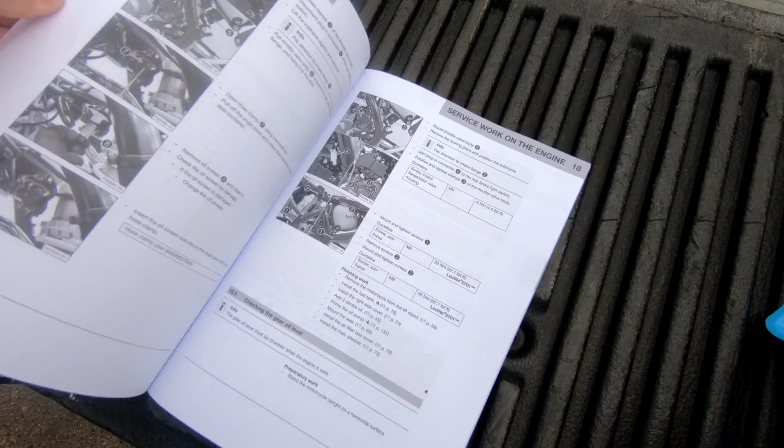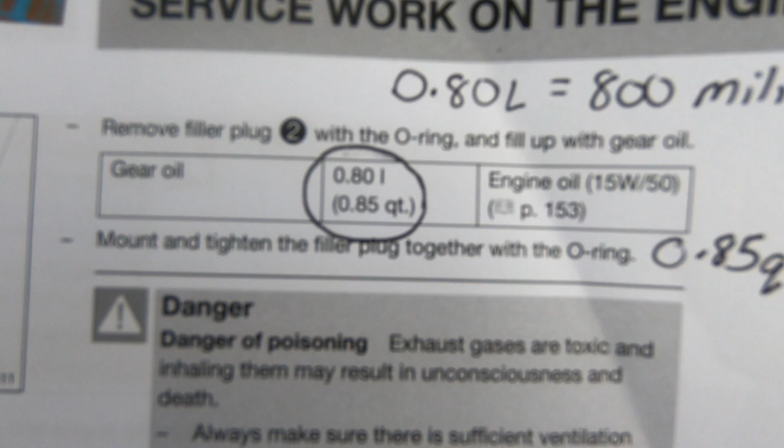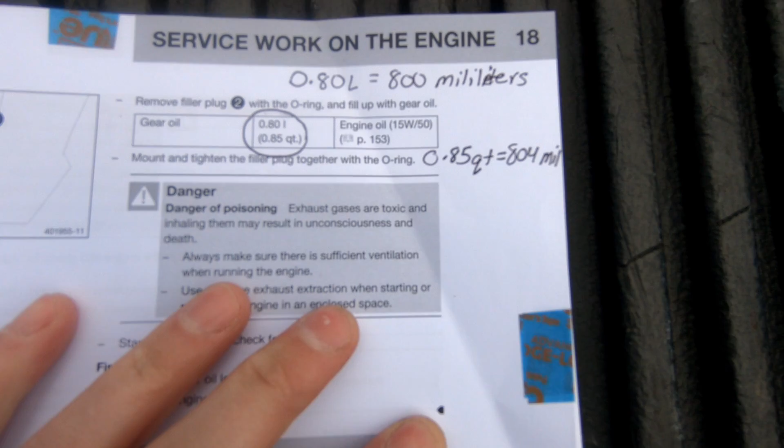Alright guys, so what we're looking at here is the 250 XC TPI and the 300 XC TPI manual, and we got the owner manual for the 2020 150i, and we're going to be looking for the oil page. All right, so on there you can see that it's 0.80 liters, and I calculated that out to 800 milliliters, and 0.85 quarts equals out to 804 milliliters. But we're gonna debunk this because I don't feel like this is correct.

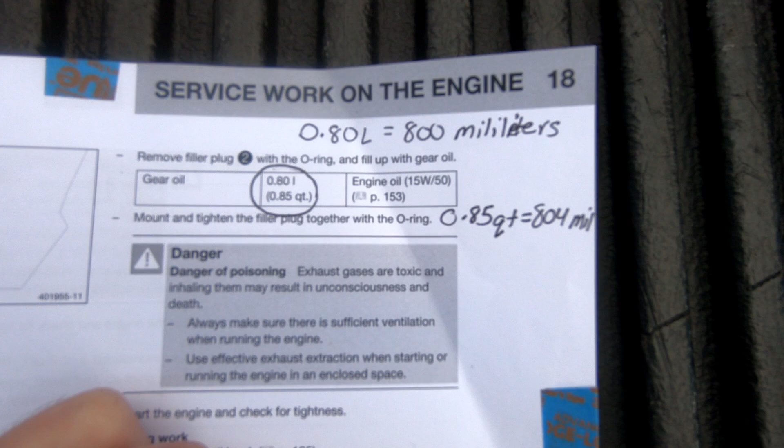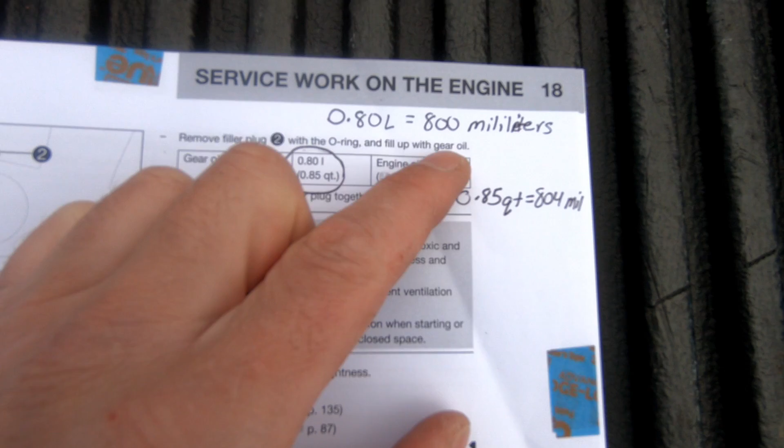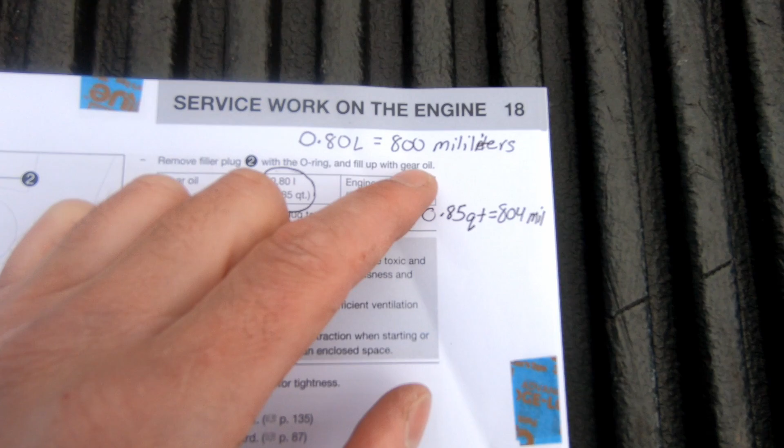My buddy has a 2020 250 XC, and he told me that he put about 730 milliliters in, and the oil started coming out the weep hole, and he claims it's because these numbers aren't, you know, wet. So in other words, if the motor was completely bone dry, then it would take 800 milliliters. And a lot of people are like, oh, what's a couple extra milliliters or whatnot.

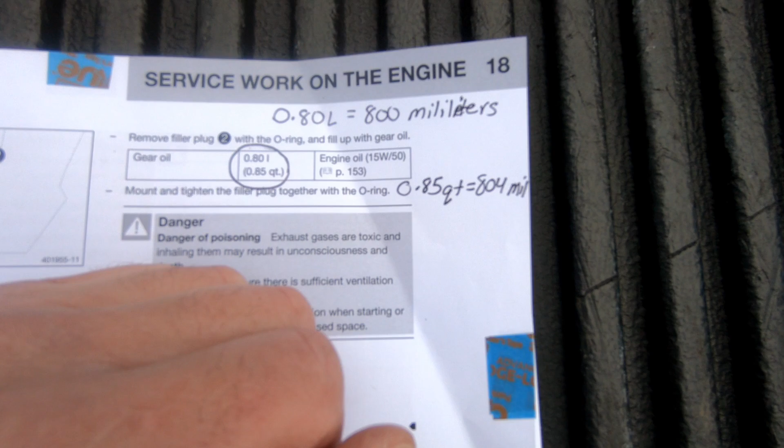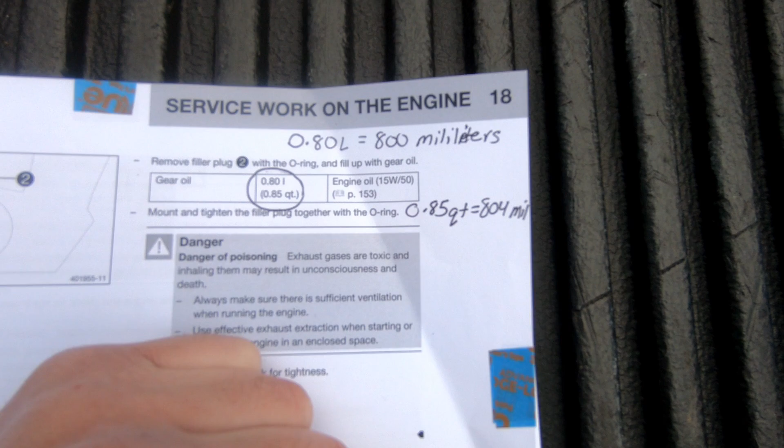It probably won't hurt anything in the 300s and the 250s, but in the 150s, the more oil you put in, the more clutch drag you'll get, and also we need as much power as we can on these bikes. So again, especially if you're using a thicker oil, the more oil you put in, the harder the motor has to work, and the less power gains that you're gonna get.

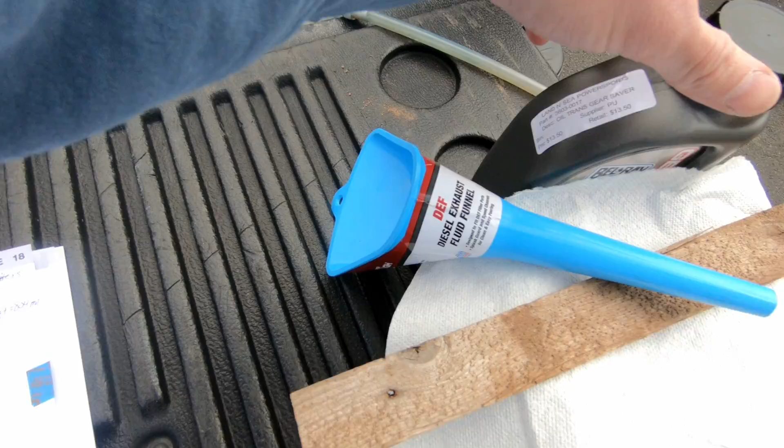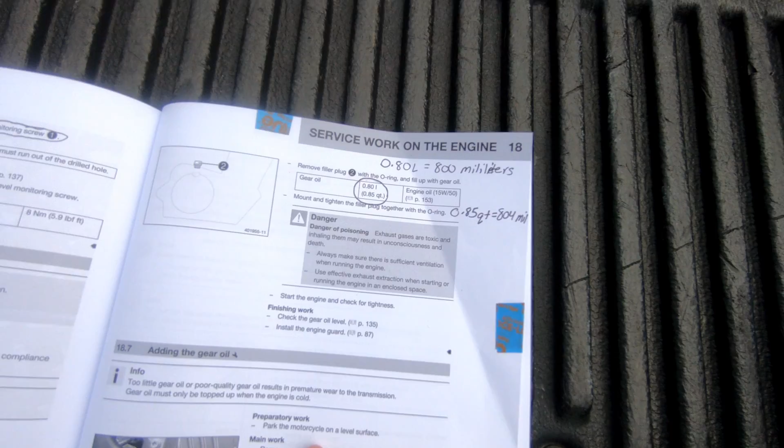Like today I'm gonna be using the Bel-Ray 80 weight. They're recommending it. I was normally using the Motorex 1550, but today I'm gonna try something a little different because it's gonna be summer soon and it's gonna be hot, so it won't really matter. So anyways, I just want to clear this up. The 150 is saying it's taking 800 milliliters.

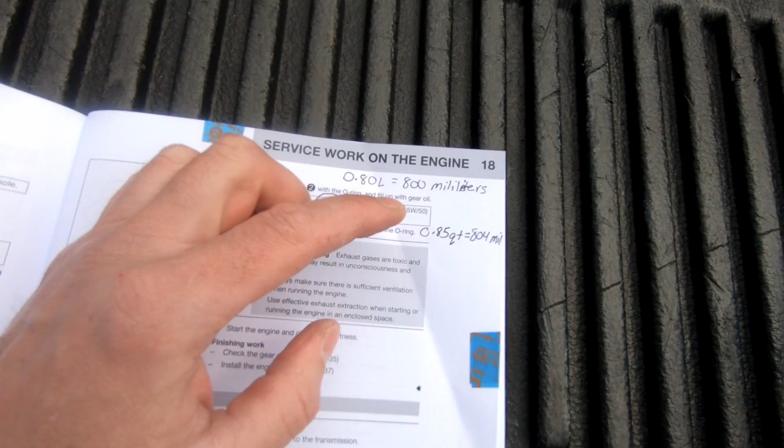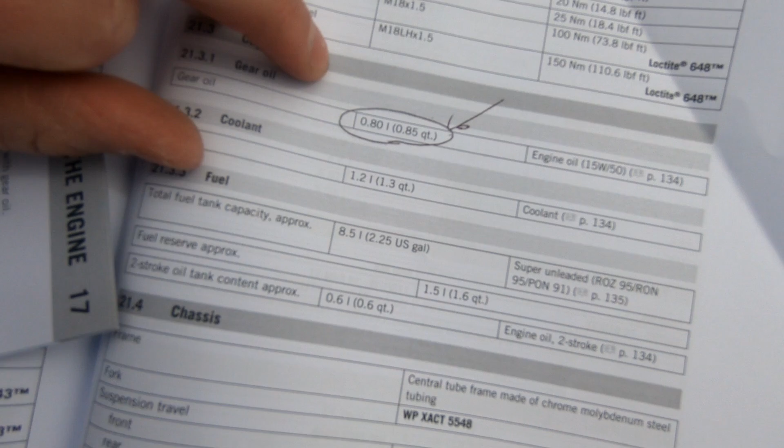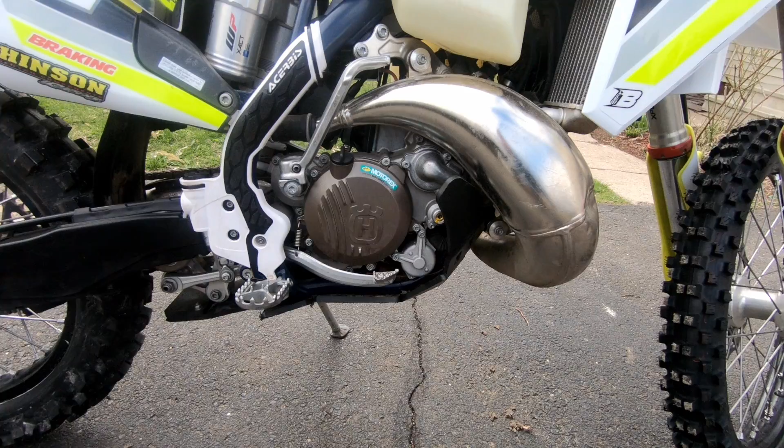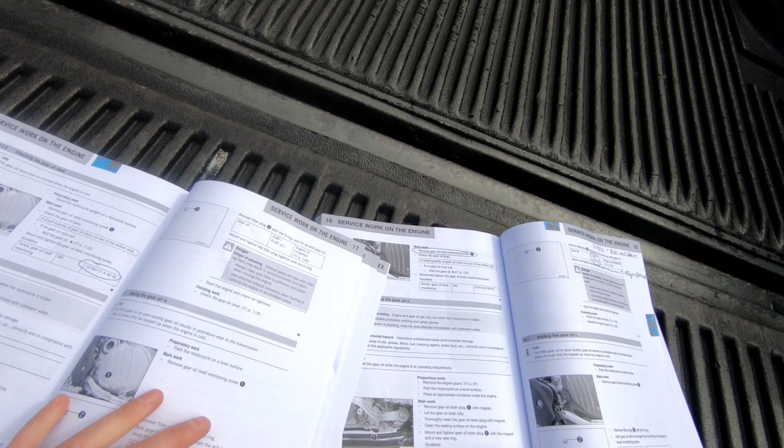Now we're gonna move over to the 250 and the 300. The 250 and the 300, again, 0.80 liters equals 800 milliliters. So it's the same. Now we're talking about this big ass motor to this little ass motor, but the bottom ends, I'm assuming, are pretty much close to equivalent in size internally. And so we're just going to debunk that all these 2020 TPIs are going to take the same amount of oil, considering in the owner's manual it's telling you that both are taking the same amount of oil.

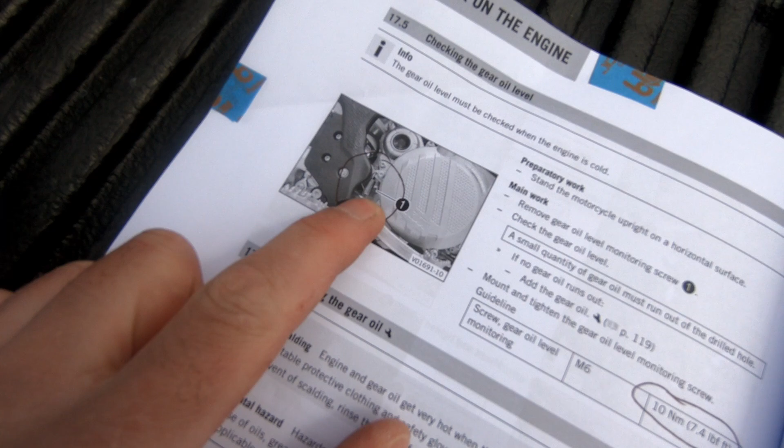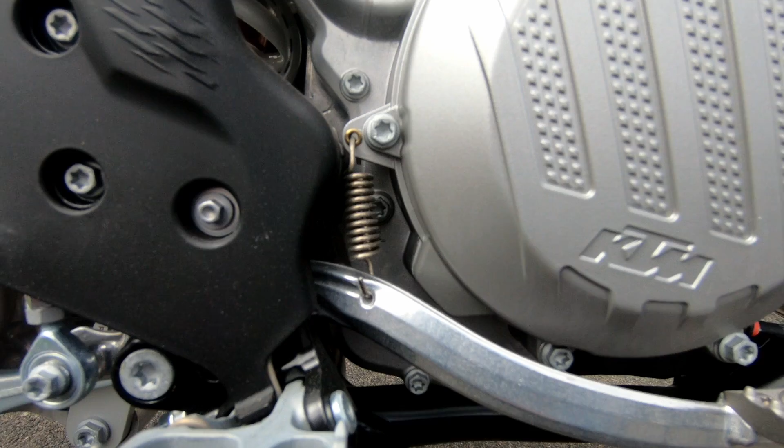So here, I don't know if you can see that, it's showing the weep hole is right here behind the rear brake lever spring, and this is for the 250. And if we take a walk over here, I don't know if you could see that, but you can clearly see that bolt, and it does say oil right under it. And if you can't see it on the video, you'll see it on your bike. But so we know where that one is. We don't need this manual anymore.

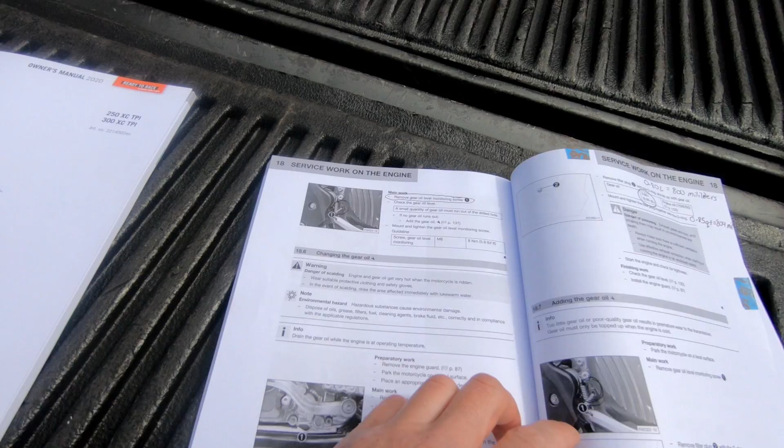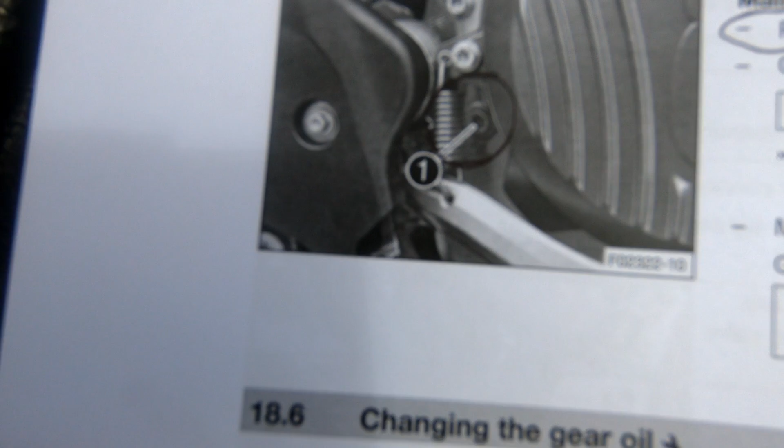So the 150i shows the same exact location behind the brake lever spring, and it says oil on it. So something tells me that they just used a fucking generic, this is for the 250 and the 300, but they didn't want to waste their time putting the correct location for the 150, and they just let everybody guess.

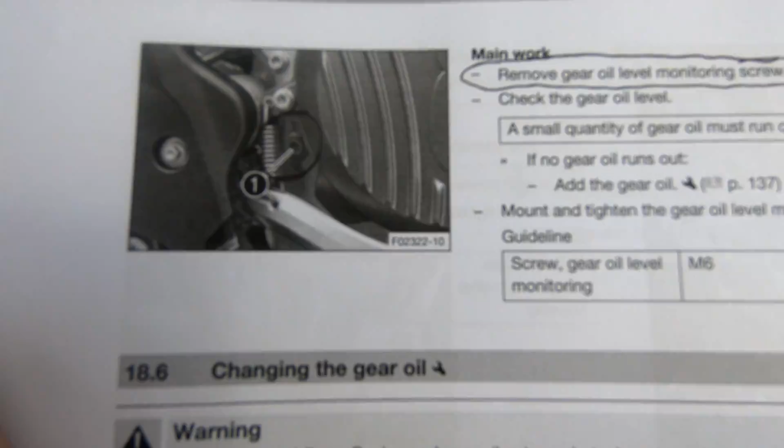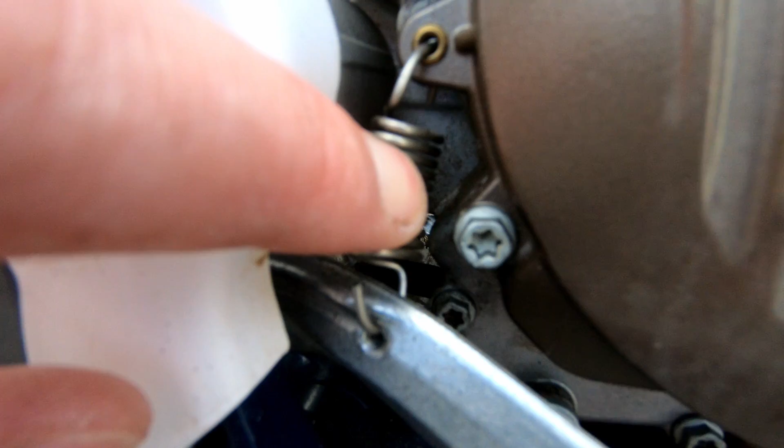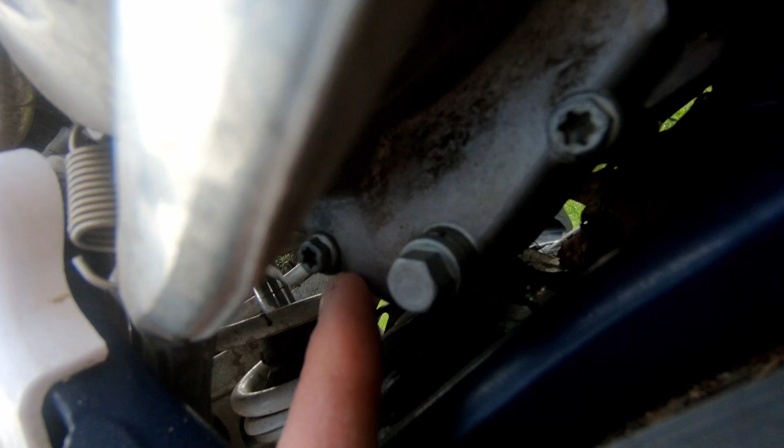And if we come over here on the 150, there is no bolt, you know, weep hole behind this spring. The closest one is the one all the way, I don't know if you can see that. That one right there. And there's no fucking way that you're putting that little bit of oil in this bike. So I'm going to show you exactly where the weep hole is for this bike.

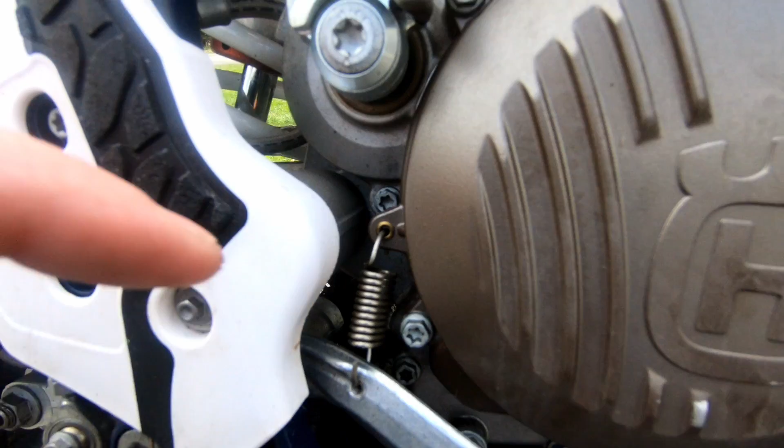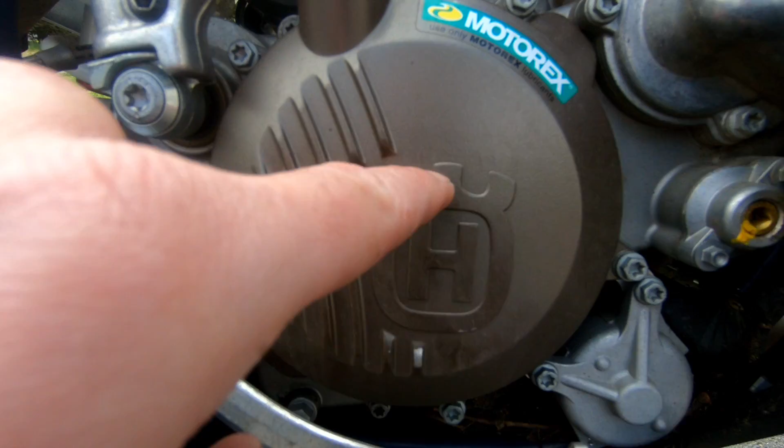And people were saying it's here online. Other people were saying it's this one online. And this is just too, the oil level is too high. It's half. Now, the main purpose of the oil in these bikes is to lubricate the clutch plates, to lubricate the gears and the crank. That's it.

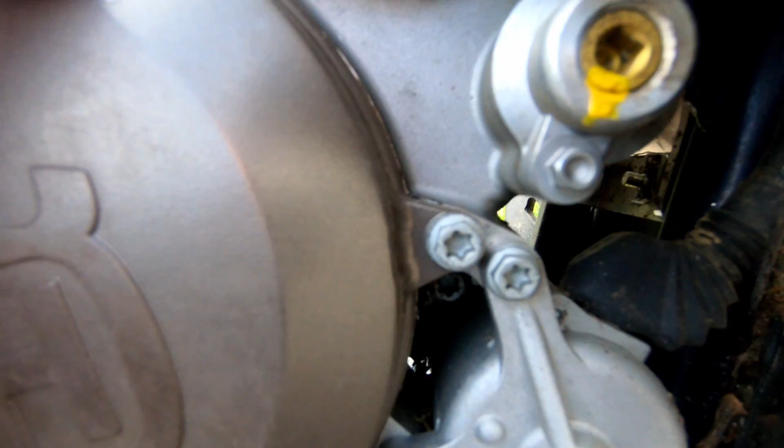Correct weep hole location, if you can see it all the way down in there, that is your correct weep hole location, where I'm assuming you're going to see the 730 milliliters after we do this little oil change. And the reason why I know it's the weep hole is because when you pull that off, there's a copper washer, and the weep holes, we all know, have the copper washer.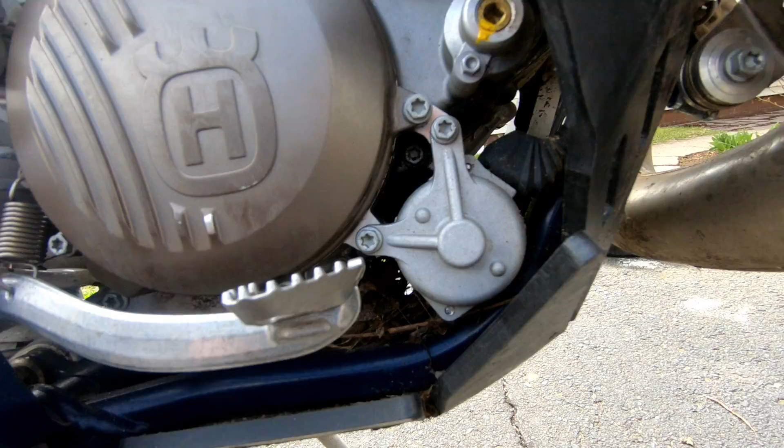So, another thing I find weird is there's a secondary drain plug here. The main drain plug's on the other side, but you don't need to worry about this drain plug, because when you drain the oil on the other side, you just tip the bike and drain it all the way out. I tried draining oil from this side after it drained from that side, and almost nothing comes out, so you don't even have to worry about this side. So let's get started on this oil change and see what happens.

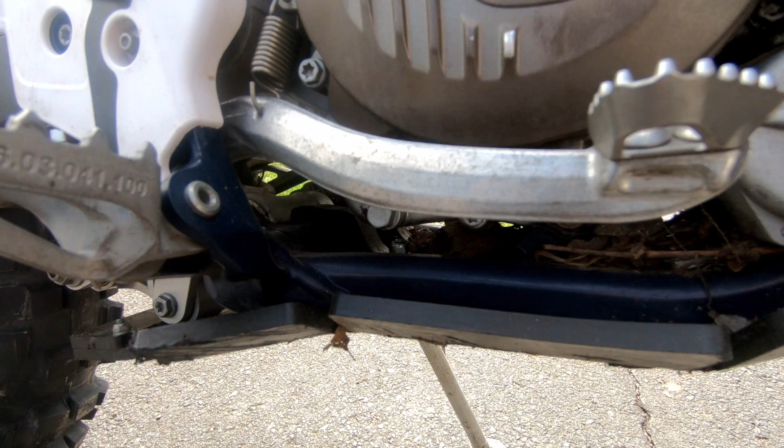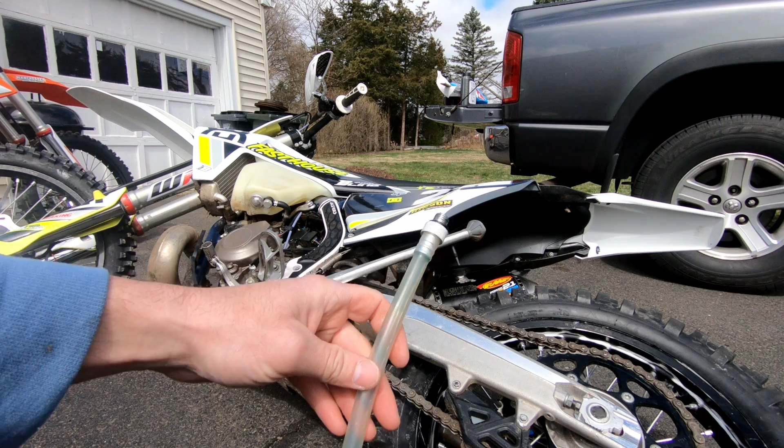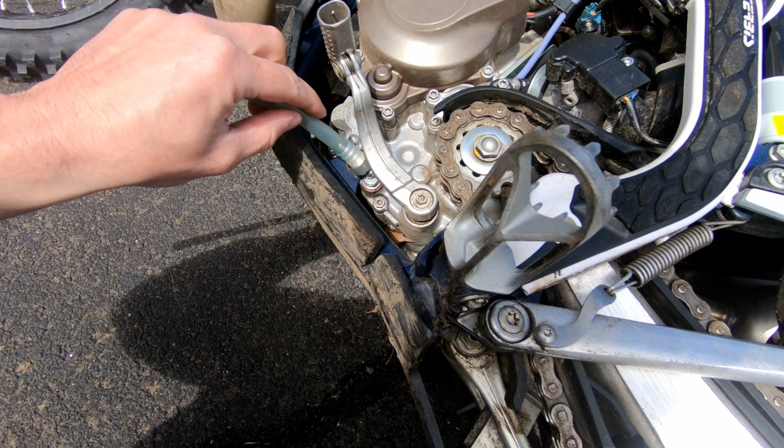Hey guys, I'm back, and as you can see, I got the bike leaned over on its side, and the reason why I did that is because I am going to be using this handy dandy tool, which is the oil drain hose, and it makes life a lot easier. So that way, if you got a skid plate, the oil is not going all over your skid plate and all under the motor, because it does. And this helps out a lot.

If you don't have one of these, they're about $12 on eBay, or I think I got this on Amazon. But if you don't have one of these, you can make a funnel out of cardboard or paper and stick it under there, and it'll work the same way. So you're gonna need a 13 millimeter, and we're gonna pull this drain plug. It's got the copper washer in there.

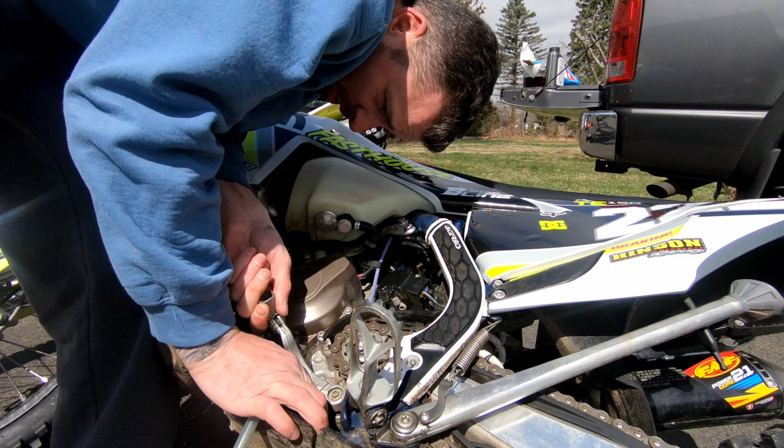Careful not to lose that copper washer, and we will thread this drain hose in. It's only got to be hand tight. You don't got to go crazy tightening it. And you can see I got some shavings and stuff on here. I think I got about like 16 hours on this bike.

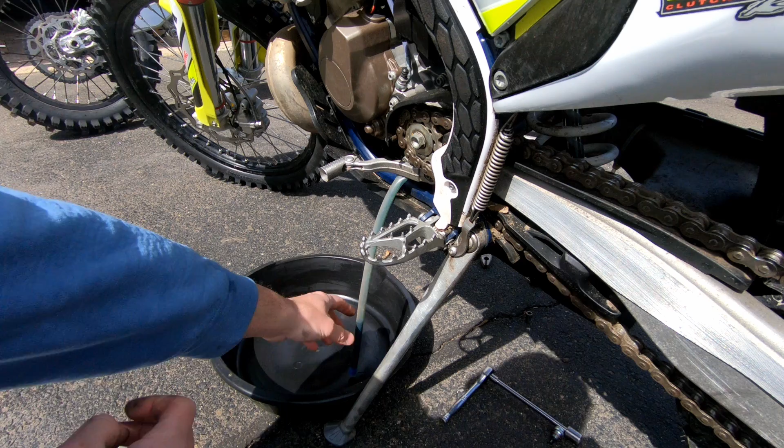Alright, so we got the bike up, and I got the fill cap off to help with this draining. I'll take this little cap out here. And the bike was warmed up before I started this video, because I learned my lesson doing that the first time. I totally forgot to warm up the bike, and this oil came out like molasses. It almost didn't even want to come out. So do yourself a favor, make sure you warm up the oil, and it'll drain a lot easier.

So this is a good tool. Like I said, it brings the oil way out from the oil pan. Otherwise, in this little galley right here, the oil is gonna just collect in there and then come down in the back, and it just makes a huge mess, and it's not fun. Because that was my first oil change. I learned the hard way, and I spent the 12 bucks on this oil changing hose.

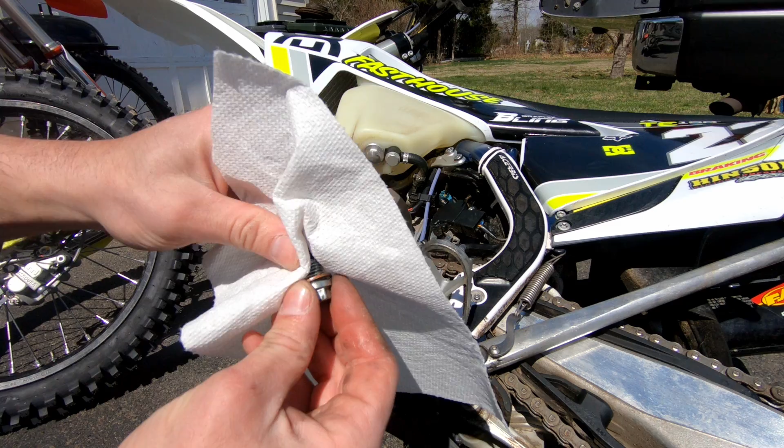Alright guys, the oil is drained, and I'm gonna stick the plug back in, but just make absolutely sure that you clean all this gunk off, all the shavings and everything, before you put that back in there. It's common sense. Clean off the face of the drain hole too, if you want.

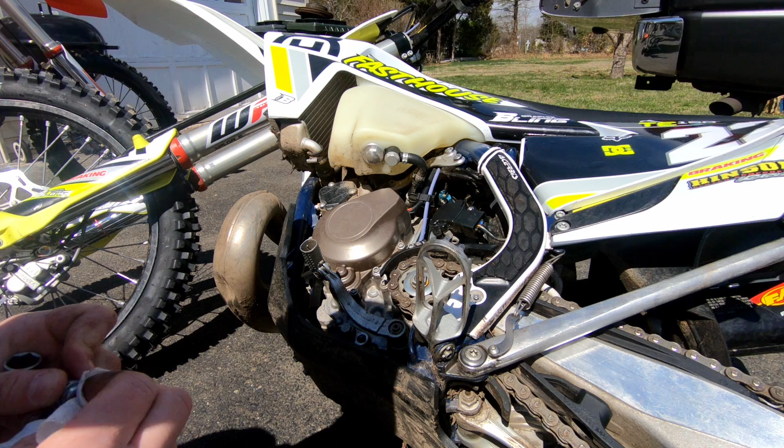And install. Alright guys, so now we're going to remove the weep hole screw. And again, it's right underneath of this one. It's inside this little cave here. And see how not tight that was? That's literally how tight you got to do it, because you will strip those threads out so easily.

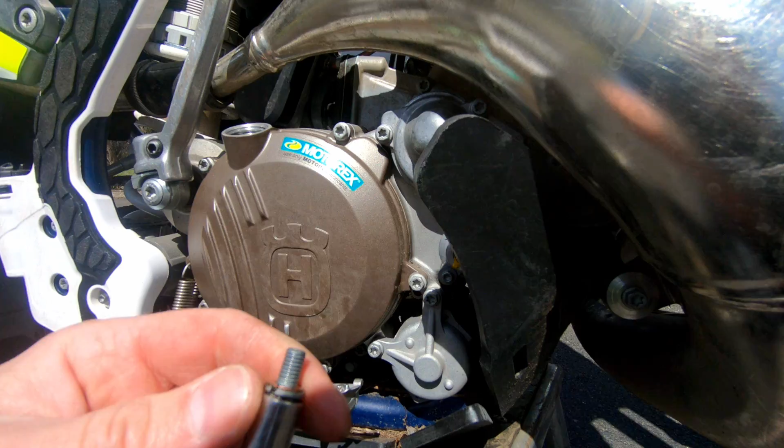But I'm doing this one time, and I'm gonna throw a little dab of thread lock on just to make absolute sure that that stays in there, and I am never pulling it out again. I'm doing this for science. In the sun, I'm on my driveway.

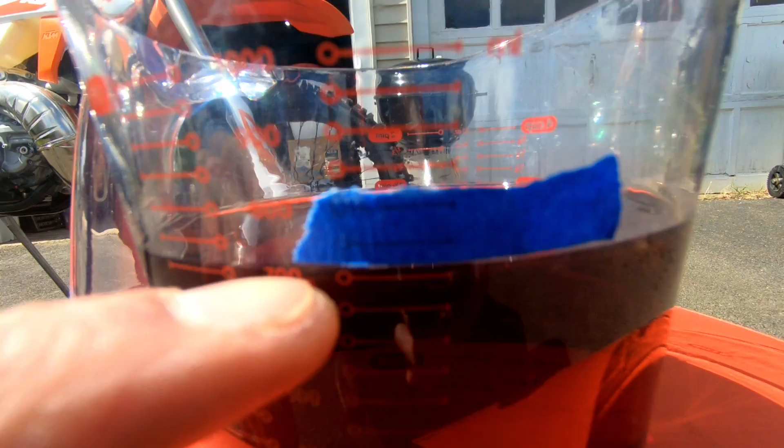I don't know if you can see that. So we got 800 there, 700 there. It's pretty much right in the middle, so it's just under 750. So that's either 740 milliliters or 730. They don't have the numbers in between, but I took a really close guess.

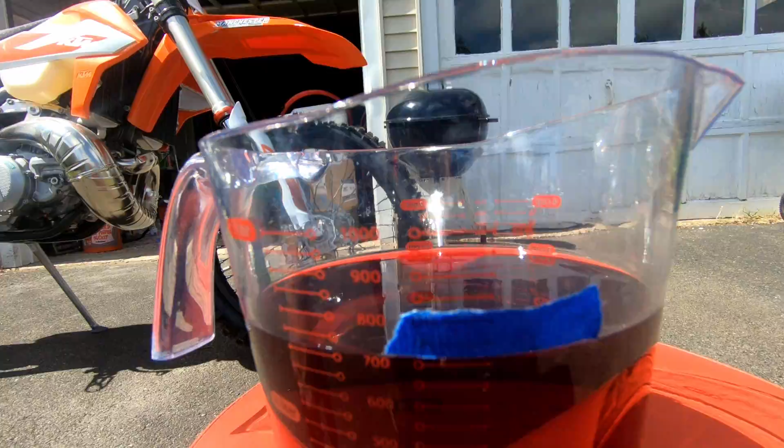So my bike right now is as level as it gets in my driveway, and I'm going to try to get you guys in as close as I can. Unfortunately, I don't know. Let's see if I can get this lower. Alright, let me get my funnel.

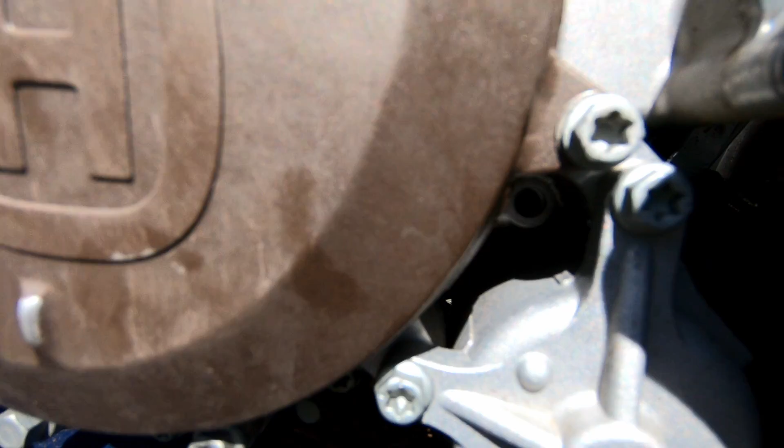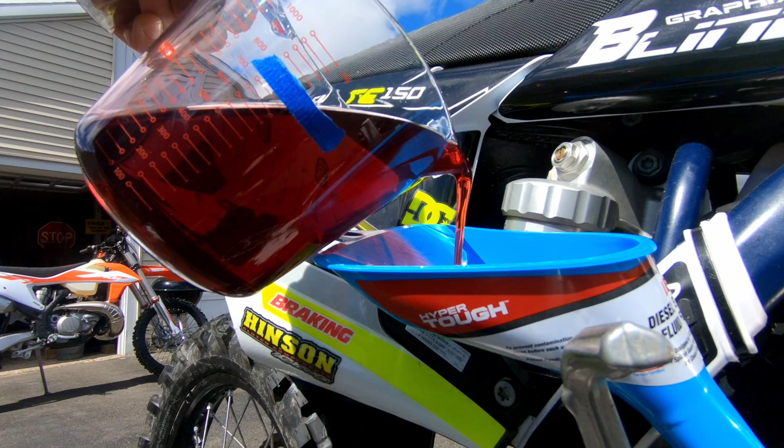And man, I know I can't see in there, so I know it's gonna be tough for you guys, but I'm gonna start pouring this in, and once we get close, I'll see where we're at. So I'm pouring it in now. Man, it's windy out. So once we get close, I'll zoom back in there and see if we can see anything coming out.

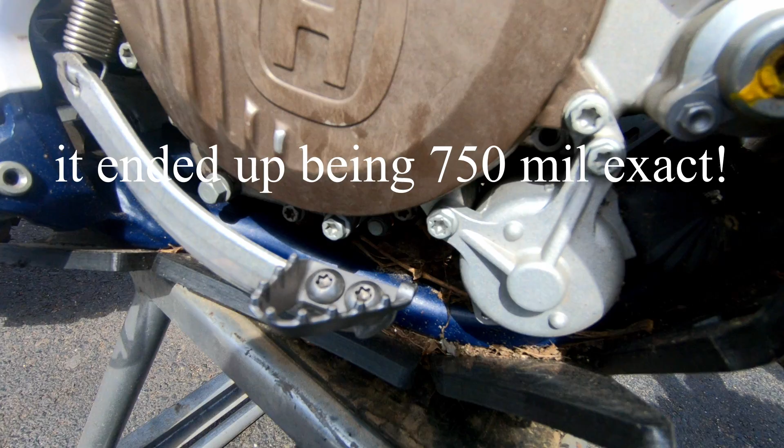Alright, we're getting close right now. I'm going to continue pouring this in until I see something coming out. So we're almost there. And that's all of it. I used it all. That was 730 milliliters. It's starting to come out right now.

So 750 milliliters is the exact. I don't know if you can see that, but it is coming out. So I'm gonna put this in. Let me get some thread lock. And I know some of you are gonna be like, "Oh, don't thread lock it, yada yada yada." I'm putting such a tiny dab on, but I don't care. It's my bike, and I never plan on opening that ever again.

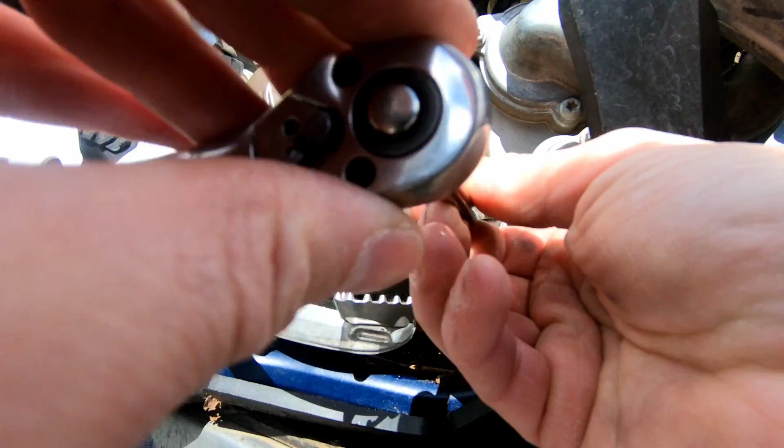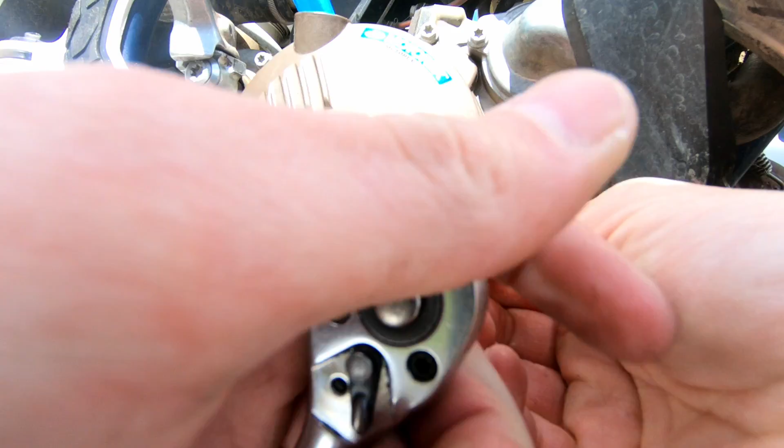I actually probably put a little bit over. It's probably 840 because it was leaking out quite a bit. It was just taking a while. And when you tighten this, if you decide that you wanna do this for yourself, I am telling you, that tight is all you do. Trust me when I tell you, just go that tight.

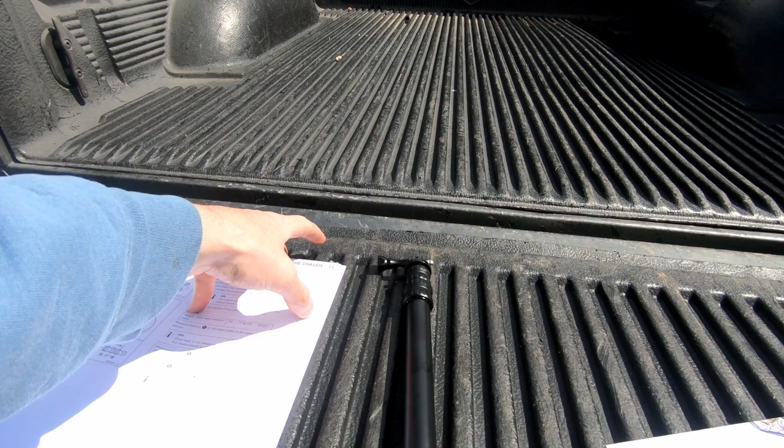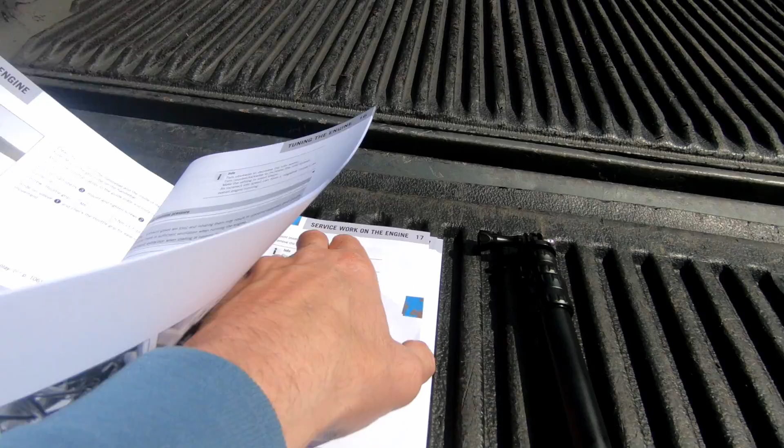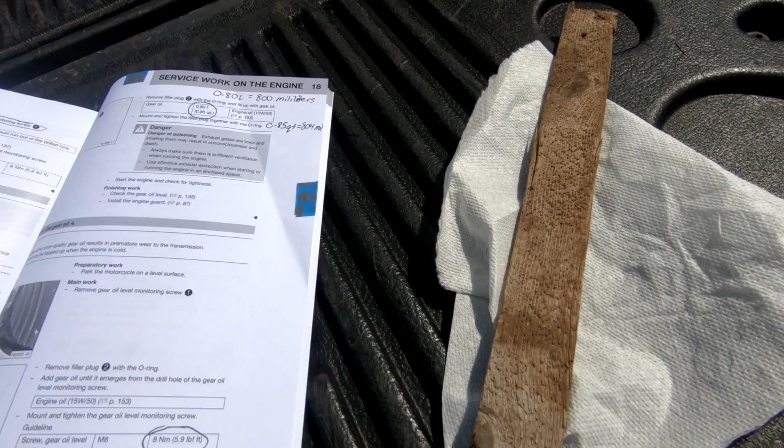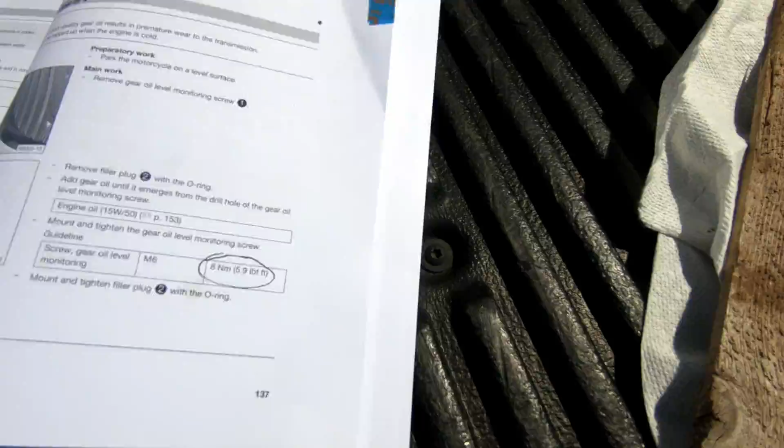And that's that. So my reasoning why people are stripping that screw out is these are both basically the same engine, and I think the 250 is slightly bigger, but I don't know if you can see it, it's 10 newton meters, and on the 150 it's 8 newton meters. So let's take a look at the sizes of the bolts.

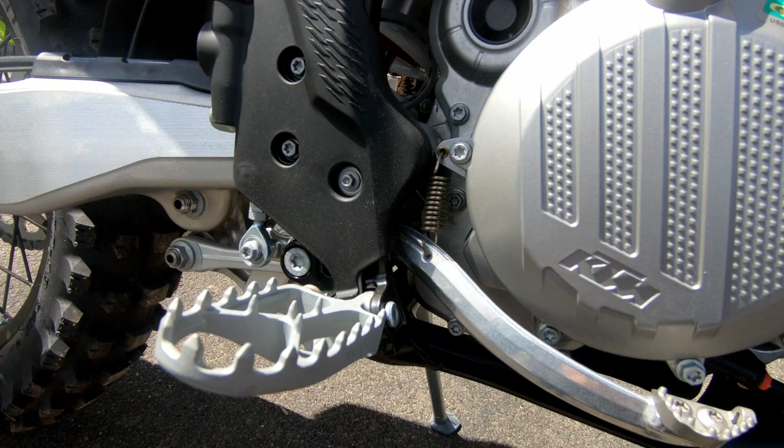Ah, it's the same fucking size. So there you have it, guys. If you really want to do it the right way, I would go with the 8 newton meters instead of the 10 newton meters. I think 10 might be too much, so go with the 8 if you wanted to, or just barely snug it. Just do it by feel. But there you have it, guys.

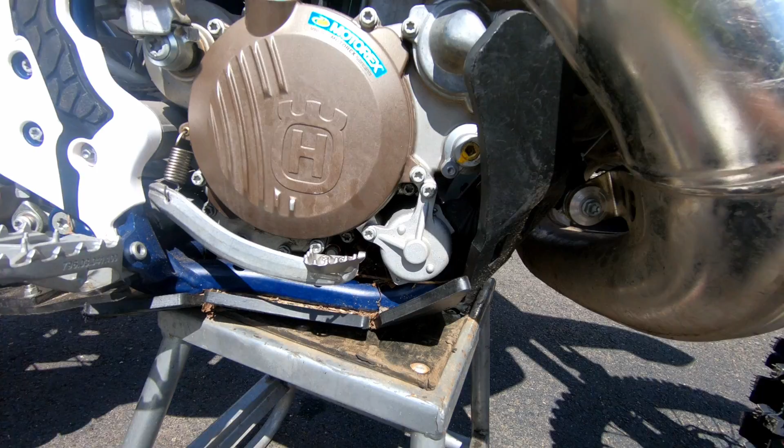But my real reason for making this video is so that you never have to pull that weep hole bolt out and risk stripping it, when you know for a fact that 750 milliliters, to be on the safe side, will still be over. It will be over full, and it will be right here, which is just slightly under halfway of this clutch cover. So I'm going riding tomorrow, guys.

I was getting my bike ready, and I don't know if you guys remember from the old videos, the purple or pink or whatever decals, but this is what she looks like now for the 2020 race season. So pretty happy with the way she came out. Did the KTM SX front fender conversion. I was going to do the number plate, but I really like having this yellow in the background.